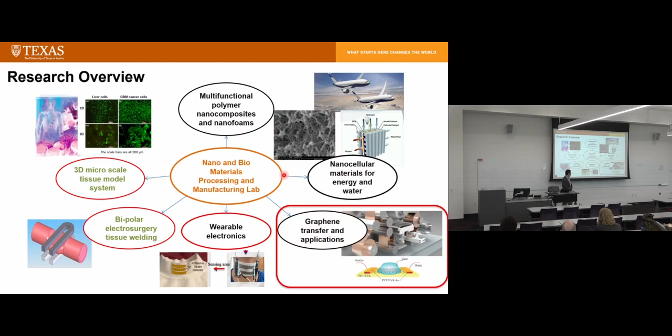We're also looking for applications using graphene. One of the major areas is graphene-based field effect transistors. So today's talk is going to focus on graphene transfer and applications. I'm mainly going to introduce our large-scale graphene-related work.

As you probably know, graphene is a single layer of carbon atoms. It has been touted as a wonder material. It has a lot of applications. If you look at the property comparison between graphene and competitors, mechanical property, Young's modulus is 1,100 gigapascal, and ultimate tensile strength is 130 gigapascal. Thermal conductivity is 5,300 watts per meter Kelvin.

And electron mobility 200,000 centimeter square per volt second. Conductivity is 10 to the 8th Siemens per meter. And optical transparency is 97.7 for monolayer. And thickness is very thin, 0.335 nanometers, because it's one layer of atoms.

Comparators: steel, modulus 200 gigapascal. Thermal conductivity 429 watts for silver and 400 watts for copper. Electron mobility 1,400 for crystalline silicon. And electrical conductivity is only 63 times 10 to the 6.

So if you just hear from the material scientists, they will say, okay, this graphene is so nice, right? The properties are so high compared to competitors, but we need to take this with a grain of salt, right? Because when we compare materials, for comparators, that's bulk property. For graphene, people are talking about single crystal graphene. So we're not so interested in other properties.

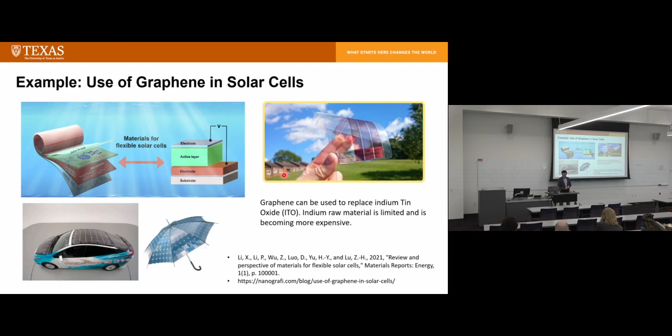So you start from graphite, and then there's some process you go through. You intercalate graphite, you separate it into graphene platelets. The platelet is really very small, in the micron range. It's not large scale. And then how do you use it? You just make a slurry and coat it on some surface. So the property is not great, but it still satisfies some applications.

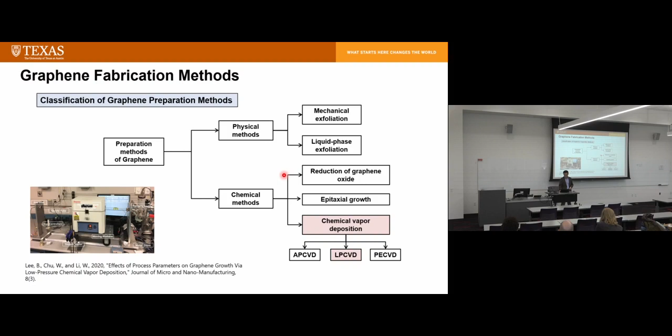In our lab, we studied LPCVD methods. This is one student. He modified the standard tube furnace growth method. He put the tube furnace on a platform so you can move the furnace back and forth relative to the sample, so that you can study the cooling effect, and that turned out to be a major effect. So we can only grow samples in our lab. This is the quality of the graphene from the student's work.

You control the gas concentration between methane and hydrogen, and control growth time, growth pressure, growth temperature, and cooling rate. Those are regular growth parameters. And you use Raman mapping to detect graphene. Usually you're looking at the G peak and 2D peak. If the ratio is above 2, then you know there's monolayer graphene. That's the goal we shoot for. We want monolayer graphene. And you can use Raman mapping to figure out if the growth is high quality, large area.

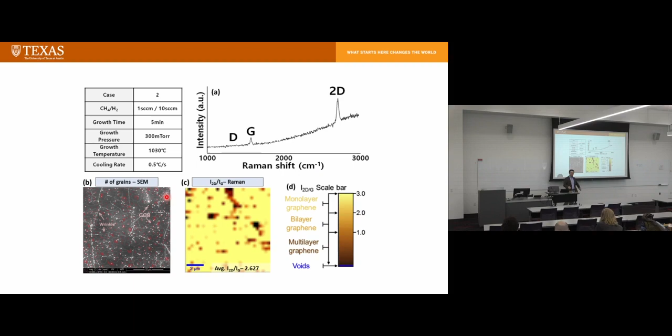But no matter how you try, there are still some defects in it. There are some wrinkles, which may not affect the property that much, and there are grain boundaries. It's like any growth process. You have grains that start to nucleate. Graphene will nucleate, then grow patches, and then the patches will start to connect to form a single sheet.

So almost all graphene research has been focusing on growing quality small-scale graphene, but there is research focusing on large-scale growth. They use a roll-to-roll process. They have rolls of substrate material for single layer graphene. The most suitable material is copper, and you just unwind the copper roll through the tube furnace, and then wind it up as the finished product. Everything has to be in a controlled environment, so you send in your gases and supply material stock, and you grow a single strip of graphene. You can grow longer depending on the facility you have.

And this is another study from MIT, John Hart's group. They were growing graphene strips. It's all controlled, and they varied some of the conditions in the tube, trying to study the effects of process parameters on graphene quality.

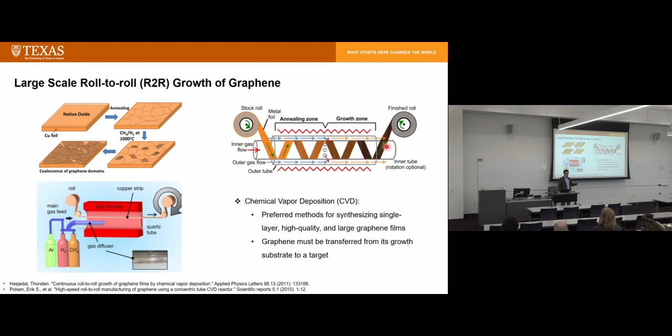So we worked with a company, Astrom. They intend to supply rolls of graphene, and we can study how to use this graphene. Since people have been working on roll-to-roll graphene growth, our research has been focusing on roll-to-roll transfer. If you have a supplier of rolls of graphene, we put it on our machine to transfer it onto some substrate, usually a transparent polymeric substrate. And that has turned out to be very challenging.

Currently, graphene transfer has been using wet transfer, where you use chemicals to dissolve the copper substrate. You laminate your polymer onto the graphene on copper or another substrate, go through chemical baths, delaminate, dissolve the copper, and the graphene is transferred onto your polymer substrate. Sony has developed this method. Because there's not much tension involved in the process, you basically have better quality. There's not much disturbance.

However, the problem is, you have to sacrifice the growth copper, which is cost, right? Production cost, and the dissolution time is long, so you have to slowly dissolve the copper. And because you use chemicals to dissolve copper, they always introduce chemical contamination on the graphene.

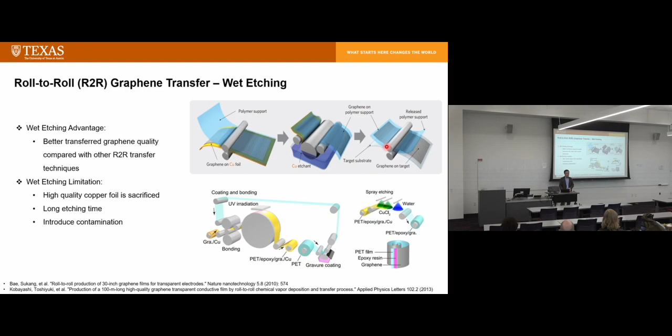So when you make graphene, you want this graphene to be pristine. There's no contamination, no charge attached to the graphene material. So later on, when you use graphene material, you can dope it, you can do other processes, you can make graphene useful. But for chemically dissolved copper, you do have pre-doped graphene, so it changes the graphene property already.

Another method is called electrochemical delamination. In this process, you laminate your graphene with polymer, and then it goes through electrochemical baths. So you supply electricity to generate hydrogen bubbles in this interface between your graphene, copper, and the top cover polymer. So this is the substrate you want to transfer the graphene to.

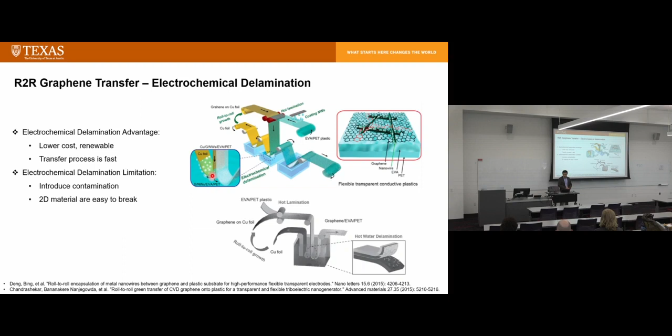So what we are doing, we're trying to develop a method that is dry. We also want to do large-scale graphene transfer, so it's a roll-to-roll process, but we don't want to introduce any chemicals. So in the process, we're trying to use a graphene dry transfer process. So we laminate our top cover, transparent substrate, onto graphene on copper. We mount it on our machine, and then we can delaminate using a peeling method. So this is a purely mechanical peeling method.

It's not very easy to do. My colleague has been using just a simple coupon and then using a tensile machine to delaminate the graphene from the growth substrate. Now we're putting it on a roll-to-roll machine. The process is even harder to achieve.

So if you are using the dry method, the cost is low. The transfer process is very fast because we're peeling it. And there's no etching involved, so no chemical contamination. But, understandably, the quality might be sacrificed a little bit, and the process itself is complex. That's why we need very good control to control the process and then improve the quality.

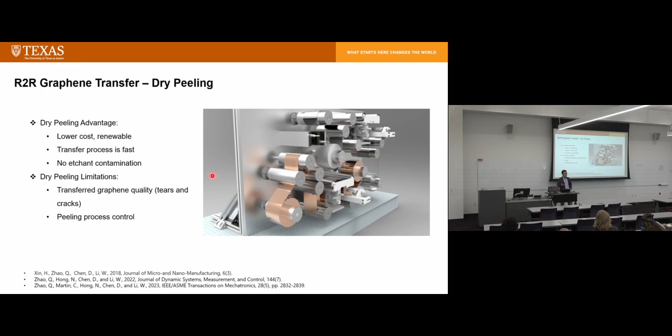So initially, the first step is to design this roll-to-roll machine. When we design the machine, we're not thinking about graphene transfer alone. We're also thinking about transferring printed electronics. Another very popular field right now is you want to print flexible electronics.

So you print your device on one substrate, and then you grow some other device on some other substrate, and then you want to transfer your printed device onto that other substrate and make it one integrated device. So we're thinking of printed electronics transfer also. As you can see, the design concept is you have certain devices you printed, and then certain areas you don't have that. So during the process, you could have sticking and slipping, different actions.

About graphene, we are about mechanical transfer. We are developing a model to model this process. Although it's a roll-to-roll transfer process, what's important is only this peeling front over here. So we have two guiding rollers, an unwinding roller, and two rewinding rollers.

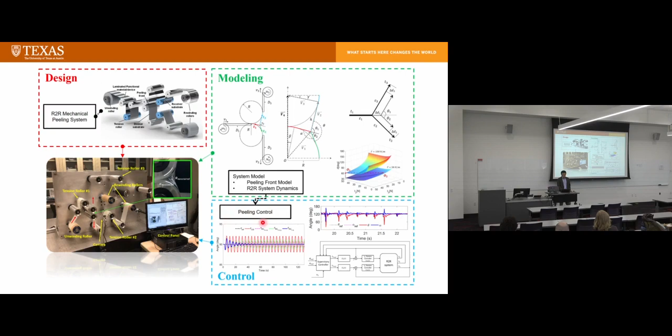That presents a very high challenge to control systems. So we develop a system model, and then a peeling control framework, and then we can control our process. So a little bit of modeling and simulation. Basically, we use energy balance. We have the energy release rate and adhesive energy, and then we have energy balance and force balance equations. Then we develop a simulation model. This will run.

So basically, initially we start from controlling the tension. So we have three parts, right? We have the incoming web, we have the web with transferred graphene, and also recycled copper. So there are three webs involved in it. Three tensions, T1, T2, T3.

We can control the tension, and we can control the peeling angle, where the peeling angle is over here. So you can see this is the incoming web, and then after separation, you have two webs going out. And there's always a peeling angle here. We use theta and alpha to represent these peeling angles. You can see if you change the tension over here, your peeling front is actually moving because of the balance between energy release rate and adhesive energy.

So this peeling front, depending on the tension, is actually very hard to model because this is peeling front geometry. You have to define the speed, you have to define the angle, and then find where it is because it's in the planar 2D surface. So we developed this model, and the model works very well. And since we know when we change tensions, we can change the peeling angle.

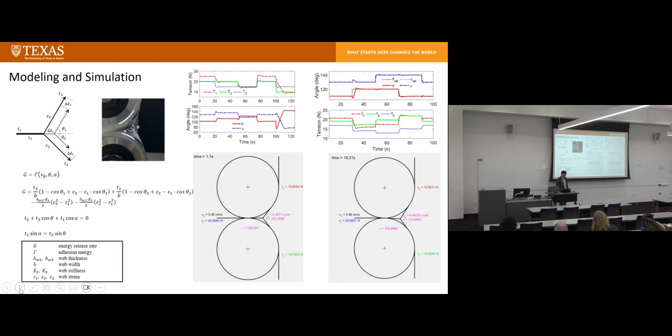So in the end, we developed a supervisory controller. For the model we have, we're using tension, and we also have an input variable, the input speed. So based on these four parameters, we estimate the peeling velocity VP. VP is the peeling front velocity, so where it goes.

Sometimes VP will stop, because if you didn't control the process well, there's no peeling happening. So the peeling front is going to shift to different positions. There's no stable peeling. And that's not desirable, because we want continuous peeling to give us controllable quality. If the peeling stops, then once it's resumed, it will generate some disturbance and generate defects in the peeling process.

So we estimate peeling velocity. If the peeling velocity is greater than 0, then we can update our adhesive energy estimation using the energy release rate. If it's not, then we have an algorithm to estimate the adhesion energy. And then we solve for the tensions we need to give us a desirable angle to follow the reference angle. This supervisory controller works very well, so we can have our tensions determined and send them to the lower-end regulators, which are PID controllers.

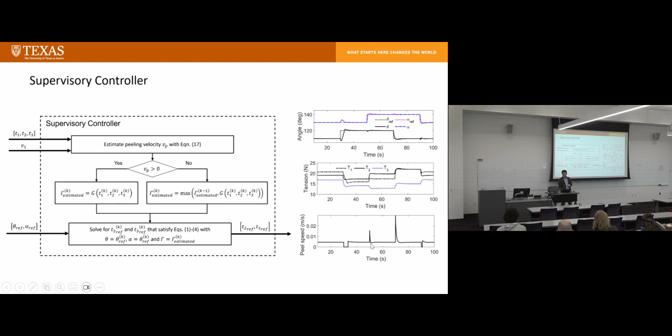If there is a desired angle change in the process, peeling may not happen anymore, because during that period of time, the configuration of T2, T3, and T1 doesn't satisfy the peeling condition. So the peeling front has to move to another location. During the move, you're trying to approach that criterion, where your strain energy release equals the adhesive energy, and then peeling will happen again. So there's a period of time where the peeling front velocity is 0, and after your peeling configuration is shifted, you can start to peel the graphene again.

So with this machine developed, there's a continuing effort to design the control algorithm so that the accuracy is much higher, and to reduce the offset and also reduce the overshoot. So that part is still going on.

Another student worked on using this machine to peel graphene. Although it shows a copper web on it, since we don't have rolls of graphene, our solution is to mount our graphene samples, which are smaller, 10 millimeters by 30 millimeters.

Still, the regular size is still huge compared to what people doing graphene research use. They only look at 13 micrometer size graphene. So these are still huge graphene samples. We attach the graphene samples onto our carrier film, and then we can start to study the peeling characteristics of graphene.

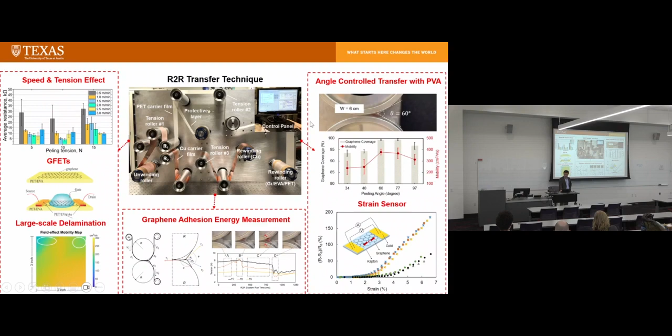So we did a process study. We studied the speed and tension effect, and then we also looked for characteristics of the graphene, and then we did a large scale 3 inch by 3 inch graphene peel, and we also studied the adhesion energy effect and also controlled angle effects for graphene transfer. And then after that, we are looking for applications for graphene.

So first of all, for graphene quality, especially on this comparatively large sheet, 10 millimeter by 30 millimeter, we want to measure the surface conductivity and also the uniformity of transfer quality. It turns out measuring conductivity of graphene on a surface is not that easy because the resistance is relatively high.

So we made an array of gold electrodes on the surface, and those gold pads are 1.25 millimeter by 1.25 millimeter square, and the gap among the electrodes is also 1.25 millimeter. And we use the 4-probe method to measure the conductivity.

But the conductivity we measure in the center and close to the edge are different because of the electric field distribution. So we did a COMSOL simulation. We figured out a correcting factor so that we can correct the edge effect of the measurement. So with that, we took average resistance measurements.

We used different peeling tensions, 5, 10, 15, and we ran the machine at different peeling speeds. So you see, obviously, the quality of the samples is dependent on the peeling tension and also peeling speed. The lowest resistance, or the highest quality, we have been able to get was when we used 10 Newton peeling. Of course, this is just a process parameter based on the sample size. So around 10 Newton and 2 meter per minute peeling speed.

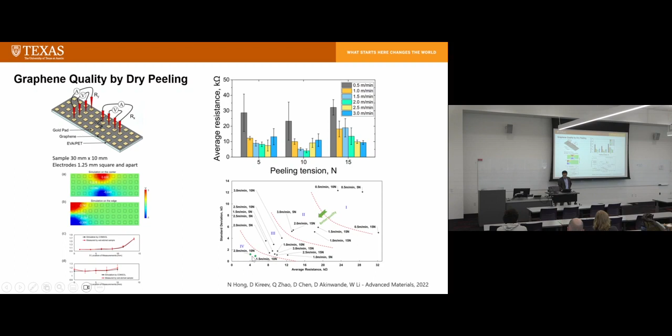And of course, the student will draw. We're not only looking at average resistance, we also look at the standard deviation, and then you can plot a Pareto chart and figure out which conditions are the best. We want to have average resistance as low as possible, which indicates higher graphene quality, and also the variations as low as possible. So in the end, we decided to use 2 meter per minute and 10 Newton as our best parameters to give us quality.

And then we transferred a lot of samples, and we want to further characterize the properties of the samples. One property that electrical engineers are interested in when they make microelectronics is electron mobility, and also, when you make a graphene-based field effect transistor, you're worried about the Dirac voltage, so V Dirac, and also the leak current between your gate and source.

So what we did is we made a simple graphene-based field effect transistor. We have a gate electrode, and on the gate electrode there is hydrogel material. This is a substrate, and we put our transferred graphene over here. This is a very large channel if you were working on graphene-based field effect transistors. We have a channel size of 3 millimeter by 5 millimeter, and we have gold electrodes, source and drain. So we use this field effect transistor to study the properties.

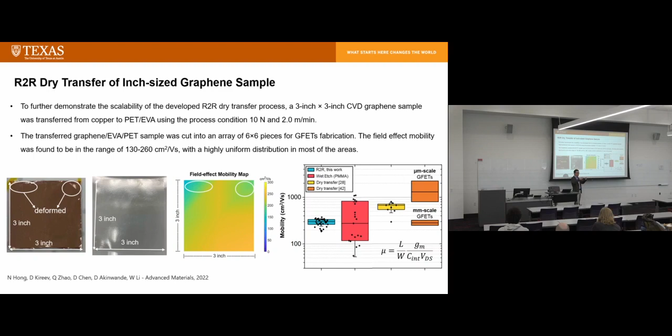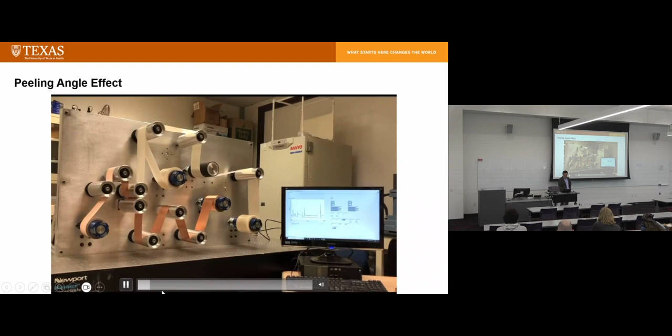This is a video showing the actual transfer process. The reason I show this is to introduce the peeling angle effect. The first sample we peeled is a 2 centimeter sample, and you see it's effortless. The peeling front doesn't move a lot, and the width of the sample is 2 centimeters, so it peeled very easily.

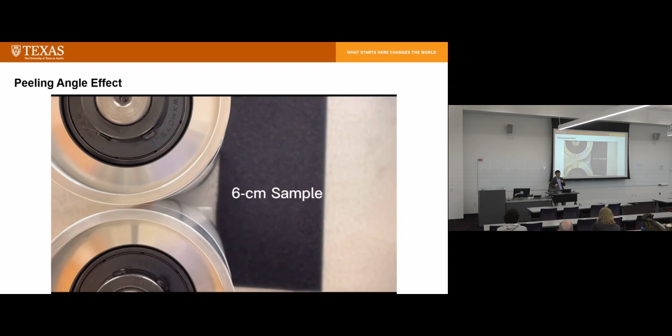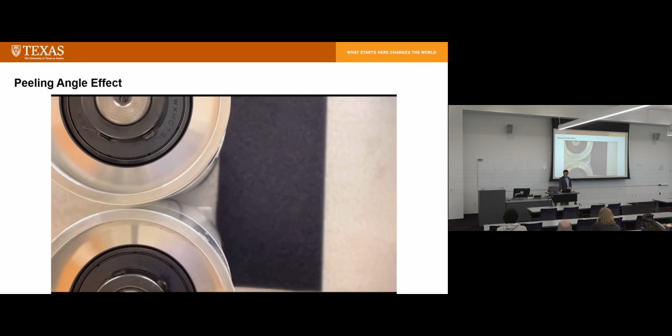And this is a 6 centimeter sample. Because the width of the sample at the peeling front changed, the peeling effort is going to change. The 6 centimeter sample needs the peeling front to move to a certain location to satisfy the peeling condition, then the peeling can start. During the experiment, we noticed the peeling angle changes, so we decided to study the peeling angle effect.

But at that time, our machine still could not do it; the force range was not wide enough, so we could not use large force. So what we did was choose a lower force, 5 Newton, and then vary the width of the sample, from 2 centimeters to 10 centimeters. This gives you different peeling effort, right? Different peeling angle. So we measured the peeling angle for the 2 centimeter width sample.

The peeling angle is 34 degrees. 4 centimeter is 41 degrees. And then for the 6 centimeter sample, we have 65 degrees, and so on and so forth, all the way to 10 centimeters. Of course, the peeling energy required is much higher. Then the peeling angle is 105 degrees. So we use 5 Newton on both top and bottom. And then we use SEM to look at the samples we obtained.

For peeling angle at 34 degrees, we see a lot of these dots over here. The white dots indicate there are certain areas of graphene not transferred, because under SEM, graphene is conductive, right? Under SEM, you're not supposed to see white dots as charge concentration. So white dots mean there are certain areas of graphene we didn't peel, so it didn't transfer.

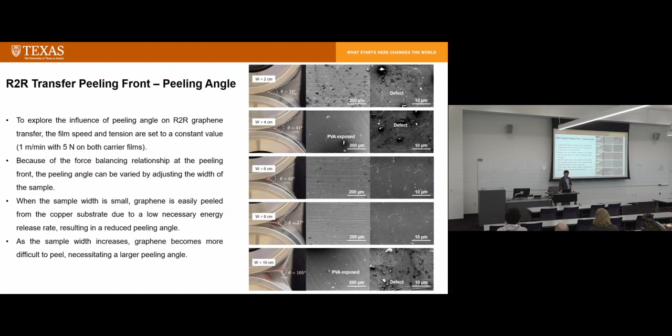And then as the peeling angle increases, we see better quality. 6 and 8, we see better quality. There are some small ones over here; those are grain boundaries, and those are small compared to those big white dots. And when you have a 10 centimeter width, now you have both defects and also cracks formed in the graphene, maybe because the tension force is quite high. So that's not good for graphene quality either.

So we looked at the Raman shift of all the samples. This is Raman after transfer, Raman shift of graphene on PVA. So we transfer graphene onto PVA; this is another type of material we transfer onto. It turns out it's not very easy to get Raman peaks for graphene on PVA, because PVA has its own Raman peaks, and so all those peaks are contaminated by this. So we did a round of Raman shift, and then we compared this and this.

So we were looking at the 2D peak and G peak, and by this we can still determine the graphene transfer and also the number of layers of graphene. So the 2D over G intensity ratio is all about 2. That's the confirmation of the transferred graphene monolayer. And 2D positions and G positions are typical graphene positions.

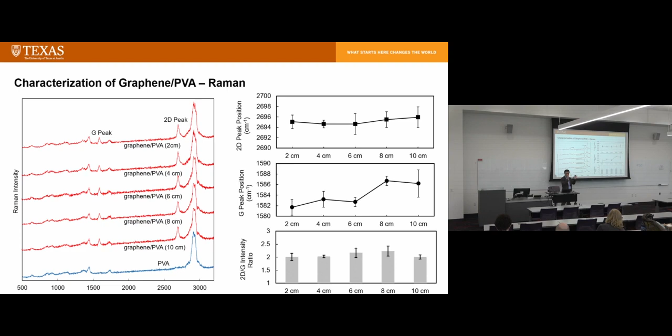And then we looked at the peeling angle effect on graphene coverage. We can use SEM to calculate the graphene coverage ratio. So you can see when the peeling angle is small, it's already pretty high, around 95 coverage. But if you have a peeling angle at 65, 77 degrees, graphene coverage is really, really good. It's almost 100%. We also did mobility measurement. When you have larger coverage, graphene mobility is obviously also higher.

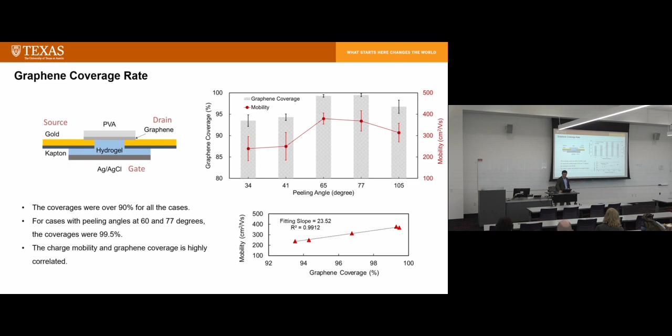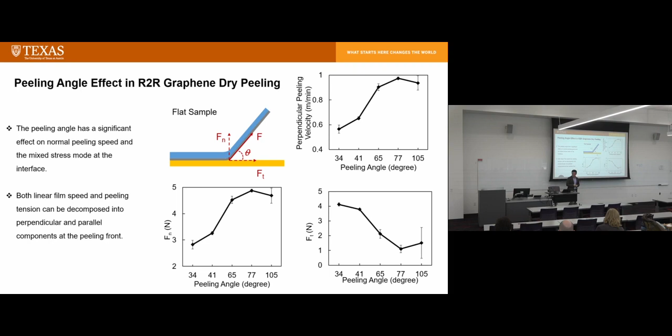So we started to look a little bit at the effect of peeling angle, right? We did some mechanical analysis. Of course, the peeling force can be decomposed into perpendicular and shear. So you can study that, but in the end, it's all adhesive energy related. So I'm going to switch here to the adhesive energy study.

How much time do I have? 10 minutes left. So maybe I can go 5 minutes. 5 minutes.

I can just go through this quickly. Graphene adhesive energy is actually a pretty important characteristic, because a lot of people measure it and the reported values are not consistent. A standard method is the blister method. This is some other people's work. They measure the graphene adhesion energy on silicon wafer, because silicon wafer is an important substrate. If you want to build microelectronics, you want to transfer graphene onto silicon wafer.

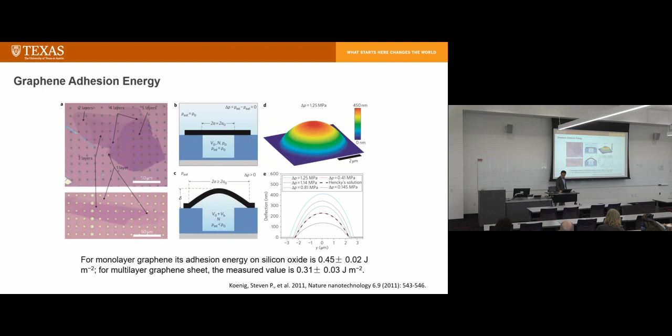So keep in mind this is transferred graphene. You have to grow graphene, then transfer it onto silicon wafer, and then measure the adhesive energy between silicon wafer and graphene. The reported value is 0.45. For multilayer it is 0.31 joule per meter square. Another study measured the adhesive energy between transferred graphene and copper. It's one step closer. The reported value is 0.51. And this is the typical blister test.

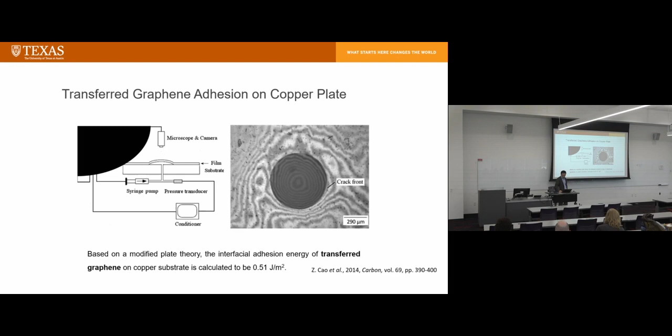So what we need to know, in terms of controlling the process and understanding the peeling behavior, is the adhesive energy between graphene and copper in the as-grown setup, right? After you grow graphene on copper, what is the adhesive energy between as-grown graphene and copper? So we use the same blister test setup.

Basically, you have an interferometer microscope looking at the top of the sample. So we made a PVA graphene on copper sample. It turns out this sample is very hard to make because it's not transferred. We have to drill a hole through underneath and then apply pressure on it so you can see the blister forming. You measure the height of the blister to back-calculate what the adhesive energy is.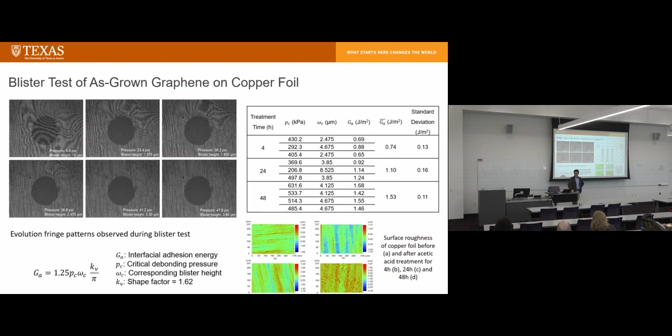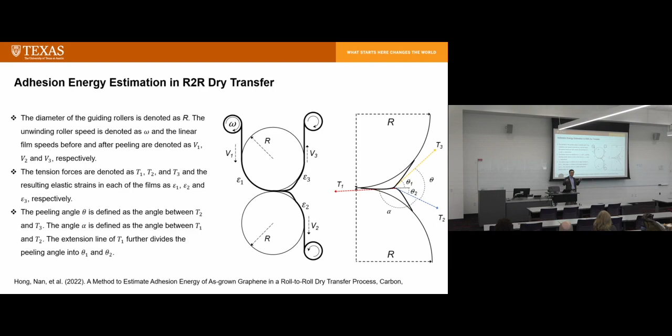So we also characterize the surface roughness of the copper, and then determine the as-grown graphene adhesive energy. So this is the first time that people have reported as-grown graphene adhesive energy using a standard method. So we also did adhesive energy estimation during the R2R process. We can do similar modeling, and then during the process, we measure tension. We can estimate the adhesion energy also, just based on the tension measurement during the R2R process.

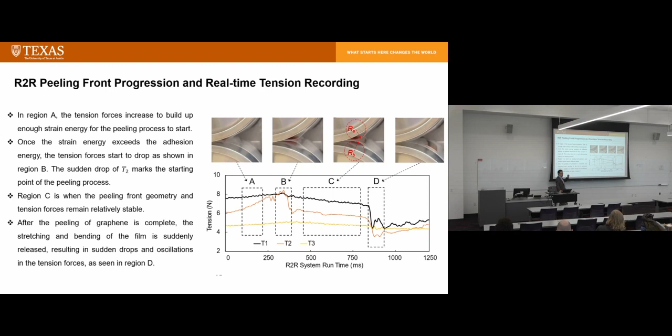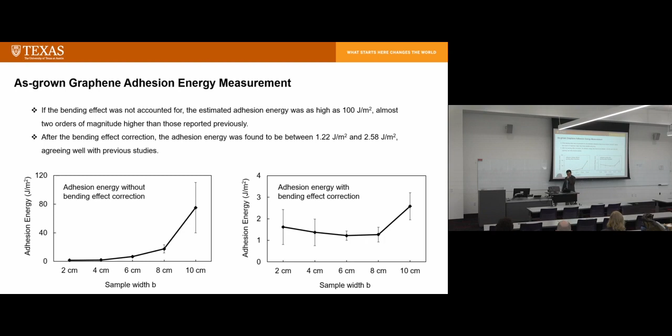And that's important because, in the beginning I told you we're not only interested in peeling graphene, we're also interested in peeling printed electronics. So inline, in situ estimation of transfer adhesion energy is important for control. So we were able to estimate the adhesion energy by correcting for bending energy. There's a lot going on in the peeling process. So the result we get is actually similar to the result we get from the blister test. So that's another way of estimating adhesion energy.

So in the interest of time, I'm going to wrap up my talk and give you some summary points and conclusions. So first of all, as you have seen, I hope you have realized that large-scale graphene has potential for a lot of applications. If we really can break the barriers and push this field forward, you will find a lot of applications. But growing and transferring large-scale graphene is still challenging, in terms of the crystal size and reducing defects in the transfer process.

So there are efforts in Korea and in other parts of the world; they're growing single crystal graphene. So if you can grow single crystal graphene, all the problems in the transfer process will be gone because single crystal graphene is strong, right? No matter how you peel it, it's going to be peeled. It's not going to crack. And there's no defects in it. So my former colleague, Rodney Ruoff, his group is trying to grow single crystal graphene, but I think the largest crystal size is still under a millimeter. You still have those defects in graphene.

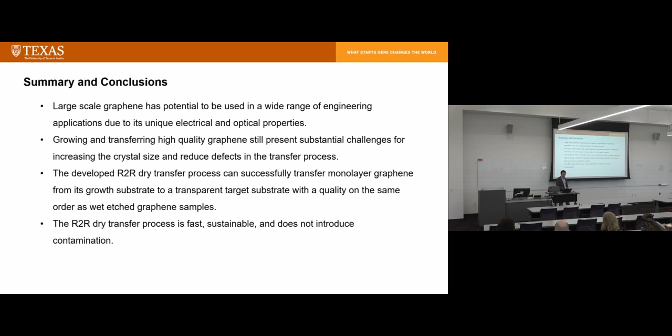And then the transfer process can be used for a lot of applications. So just a few more points on our ongoing and future work. So the dream is obviously to produce large area, high quality graphene in a low cost fashion so that we can use it to make applications.

One of the immediate applications is solar cells. So you can replace ITO and then make organic solar cells flexible, make a flexible solar cell, then we can use it in a lot of different applications. Particularly, there is a potential you can build a transparent solar cell. So you can have certain light components transmitted, so you can still see through, but you can also, in the meantime, collect electricity.

So one of the other benefits of graphene is if you compare graphene and ITO, graphene has a wider light spectrum. So you can collect more sunlight to convert it to electricity. ITO, on the other hand, is probably good for the visible range, but not so good at other bandwidths.

And then the second application area is wearable electronics using graphene-based biosensors. So one of the figures I showed is the basic idea of a graphene-based field effect transistor. We can have electrodes and the substrate is graphene, and you can put chemicals on it and put a gate electrode in the solution, and you can measure the chemical concentration or chemical species in the solution. So that's another area that we're working on.

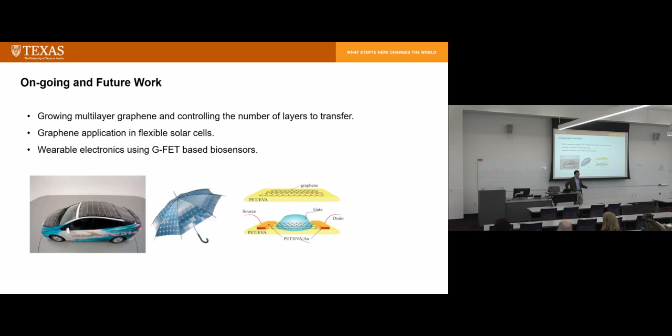And then, of course, we're continuing developing this R2R process. We're trying to be able to control the number of layers during the transfer process. So if you can grow multiple layers in the growth process, we can control how many layers we can transfer. That's another area of the research.

All right, so the work I have presented is supported by NSF, a Nanocenter project, and also a roll-to-roll manufacturing grant. All the work I presented was done by graduate students, former graduate students, Xin Hao and Wei Li, Kishan Zhao, and Nan Hong. All graduated already, and then collaborators Ken Liechti, Dong Mei Chen, Deji Akinwande, and Dmitry Kireev. Dmitry was a postdoc working with Dr. Akinwande. He's now a faculty member at Maryland.